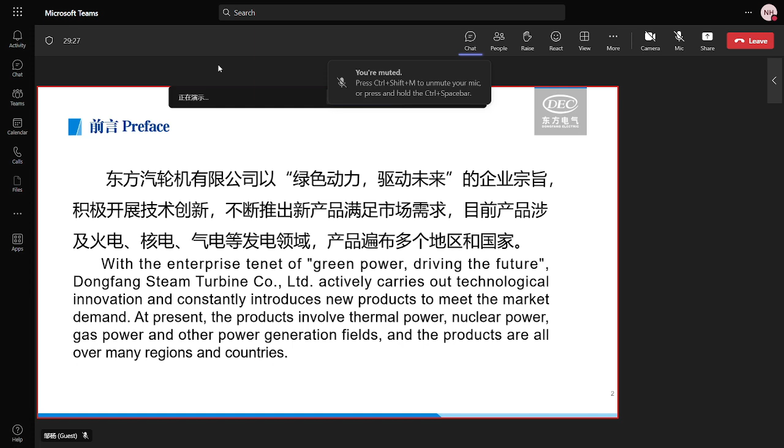Yes, we would like to start with DTC's tenet. With the enterprise tenet of green power driving the future, Dongfang Steam Turbine actively carries out technological innovation and constantly introduces new products to meet market demand. At present, the products involve thermal power, nuclear power, gas power, and other power generation fields, and the products are found in many regions and countries.

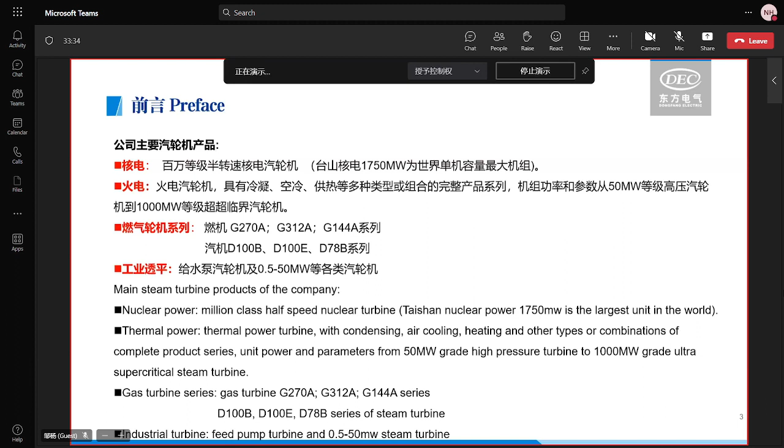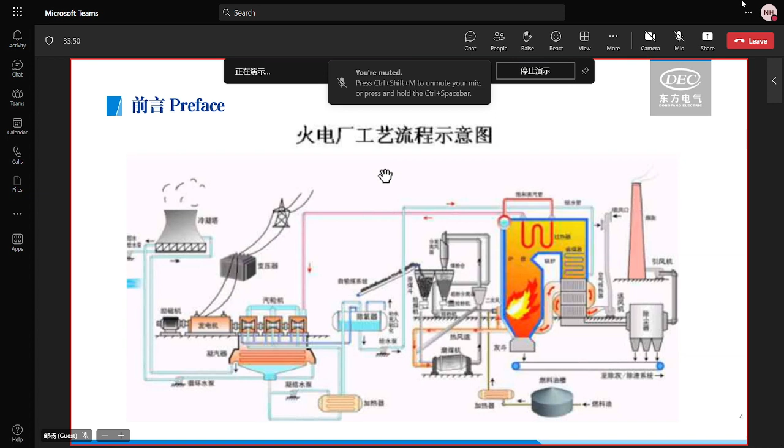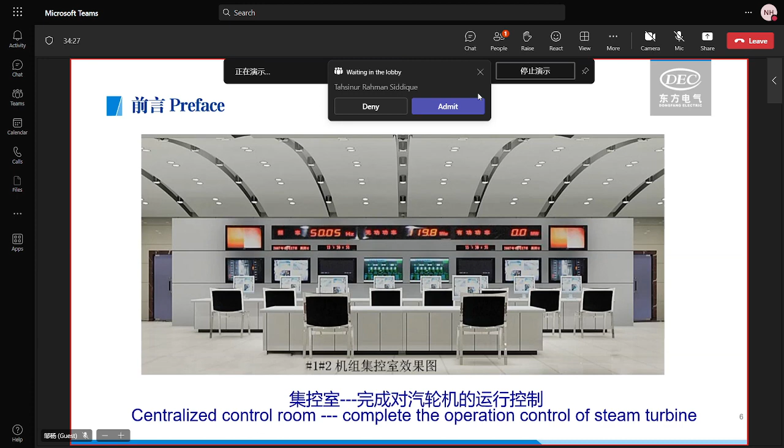This picture shows the centralized control room. In this place, we can complete the control of the steam turbine operation.

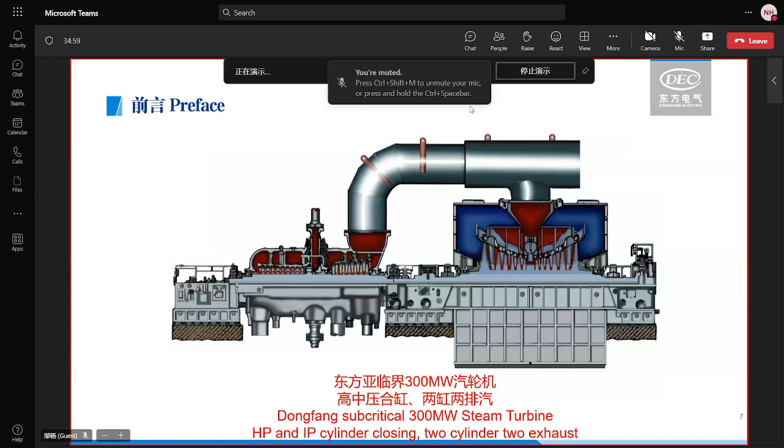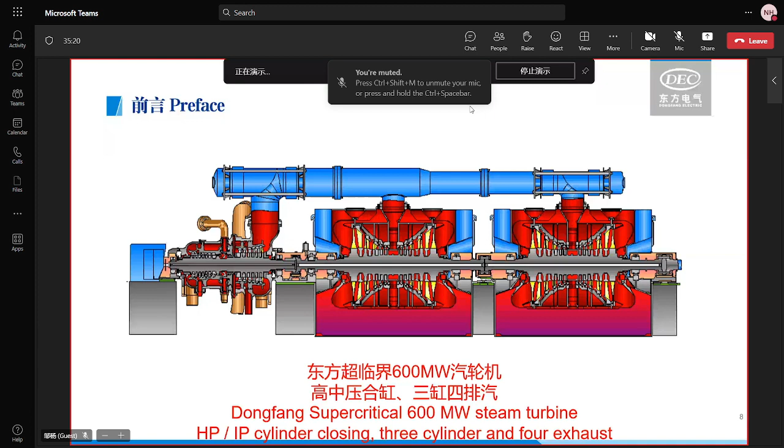This picture shows the Dongfang supercritical 600 megawatt steam turbine, which has an HP and IP combined cylinder, with 3 cylinders and 4 exhausts.

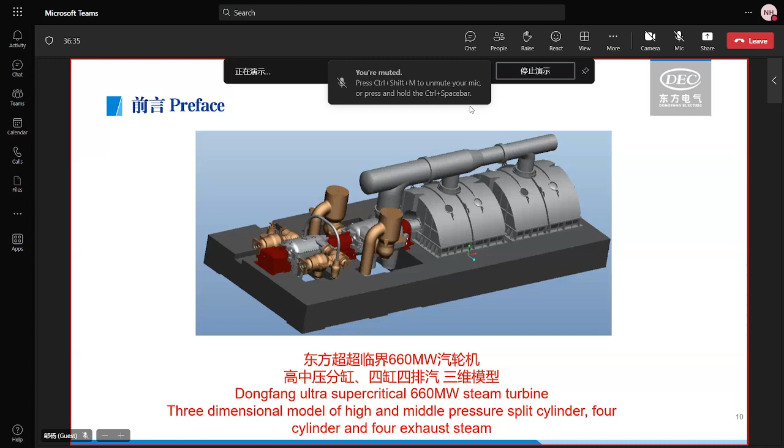That's all for the product introduction. Now we would like to begin with the introduction of typical failures and treatment of a steam turbine.

There are 4 typical failures we would like to introduce. The first is about the steam turbine main body, with 3 minor cases: the case of high temperature of the bearing pad, the case of breaker unlocking, and the case of deposit on the oil deflector.

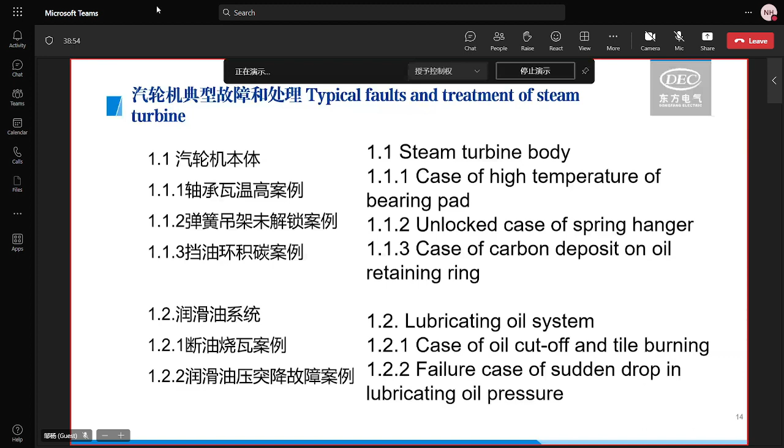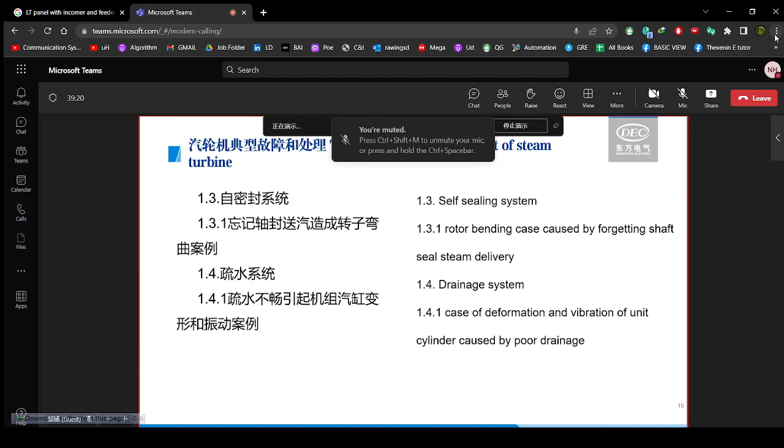The third typical failure is about the self-sealing system. There is one case: the rotor bending case, which was caused by forgetting to check the gland seal steam delivery.

The fourth typical failure is about the drainage system. There is one case: the deformation and vibration of the steam turbine cylinder caused by poor drainage.

By introducing these 4 typical failures, we would like to give our end users DEC's thoughts on on-site troubleshooting.

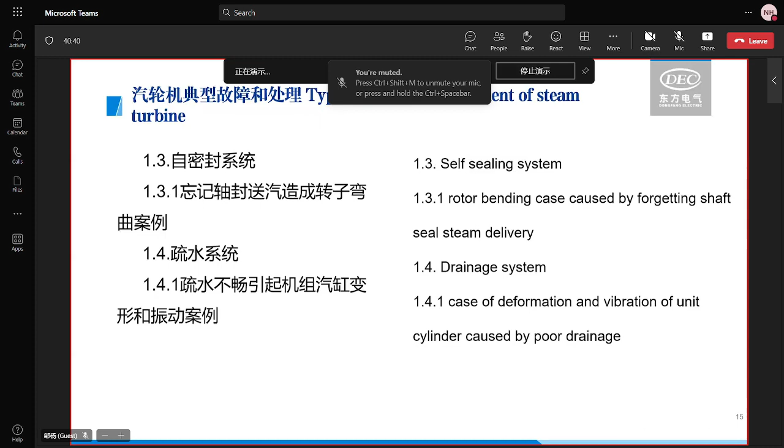Let's begin with the first case, which is the high temperature case of the bearing pad.

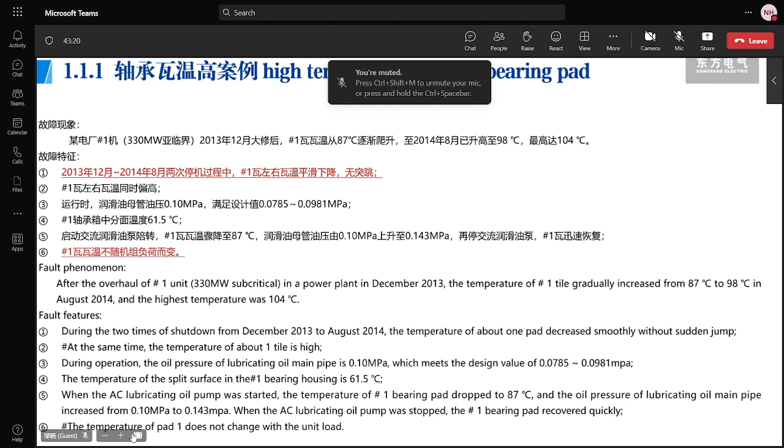Sorry, it must be the wrong translation. The temperature decreased smoothly without a sudden jump, not drop. Sorry. Is that okay? Oh, this one is number one bearing. Yes, number one bearing pad. Which is tilting pad, yeah? Which type is tilting pad? Yes, tilting pad. Okay.

Okay, we will continue. The second feature of this failure is that the number one bearing pad has two temperature measuring ports, respectively on the left side and the right side. And we found that the temperatures measured from both sides synchronously increased.

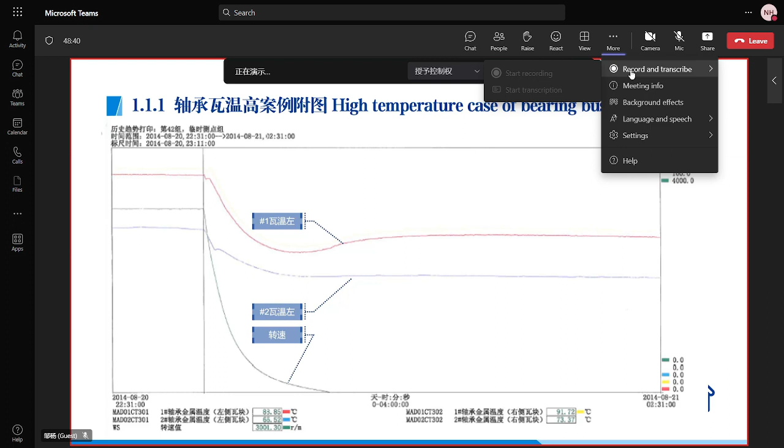This picture shows the temperature curve of number one and number two bearing pads during the turbine shutdown. It can be seen from the picture that the bearing pad temperature decreases along with the decreasing rotating speed, and there is no sudden increase trend of the pad temperature.

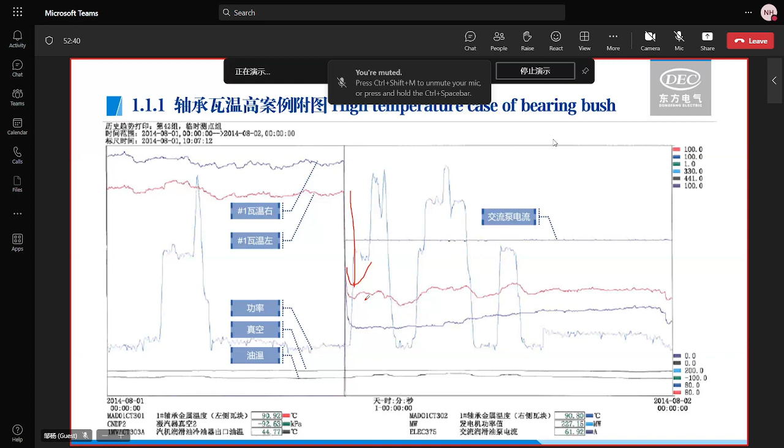第二个点为左右两侧的瓦温同时升高，可以排除测温元件损坏的一个问题。 Because the temperatures measured from the left side and the right side increased at the same time, the damage of the temperature measuring elements can be ruled out.

第三个点为轴承箱温度正常，排除了气缸热辐射对这个瓦温的一个影响。 The temperature of the bearing housing is normal, so we can eliminate the heat radiation of the cylinder on the temperature of the bearing pad.

The temperature of the pad does not change with the unit load, and the bearing pad temperature was normal at the initial stage after minor repair. So the influence of the shaft load distribution on the bearing temperature and the problem of bearing installation can be ruled out.

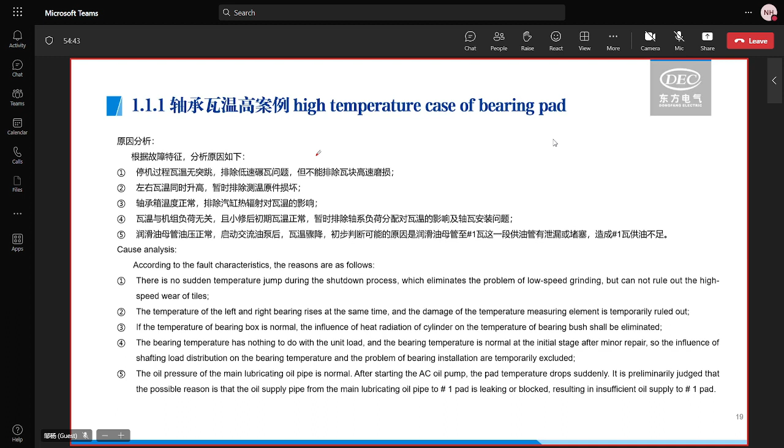The oil pressure of the main lube oil pipe is normal. After starting the AC oil pump, the pad temperature drops suddenly, so it is preliminarily judged that the possible reason is the oil supply pipe from the main lube oil pipe to the number one bearing pad is leaking or blocked, which can result in insufficient oil supply to number one bearing pad.

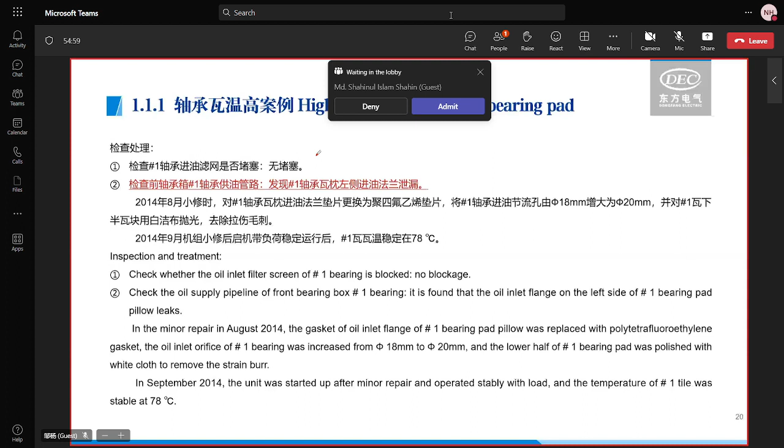然后是我们的一个检查及处理过程。第一点，我们检查了1号轴承箱进油滤网是否堵塞，结果为没有发现堵塞。 Yeah, let's take a look at what we inspected and what the treatments were. First, we checked whether the oil inlet filter screen of number one bearing is blocked, and the result is no blockage.

从第2个检查点，我们发现了问题所在。检查前轴箱1号轴承进油管路时，我们发现1号轴承左侧的一个进油法兰存在一个泄漏。 And we checked the oil supply pipeline of the front bearing box number one bearing. It is found that the oil inlet flange on the left side of number one bearing pad leaks.

在2014年8月的小修时，我们对1号轴瓦轴承进油法兰垫片进行了更换，将1号轴承进油孔由18毫米增大至20毫米，并对1瓦下半瓦块抛光，去除了拉伤毛刺。 In the minor repair in August 2014, the gasket of oil inlet flange of number one bearing pad was replaced, and the oil inlet orifice of number one bearing was increased from 18 millimeters to 20 millimeters. And the lower half of number one bearing pad was polished with the white cloth to remove the strain burr.

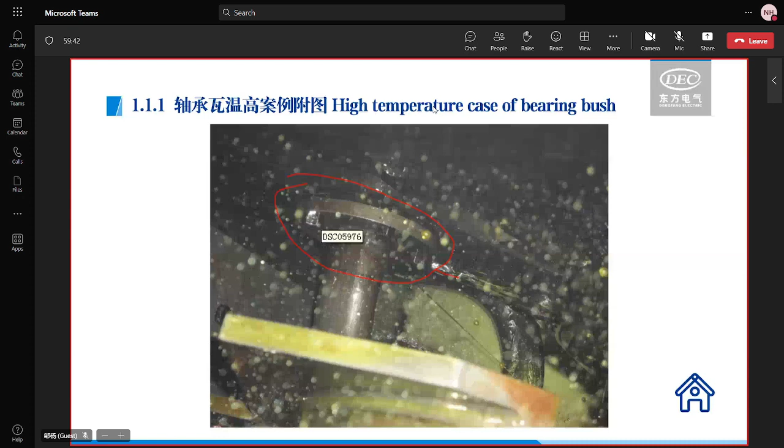The simple reasons for insufficient oil supply are oil pipe leakage, as mentioned in the case before. There is also pipeline blockage, such as whether the size of oil inlet throttle orifice meets the design requirements, whether there is foreign object blockage in the pipeline, the gauze blocking the oil hole falls into the oil pipeline during maintenance, and the temporary filter screen is not removed during the oil flushing. Specific analysis needs to be carried out according to different situations.

我们开始第二个案例的讲解。第二个案例为弹簧吊架未解锁的一个故障。 Next, we would like to introduce the typical failure of the spring hanger not unlocking. 它的故障现象为电厂一号机组… Hello. Yes. Yes.

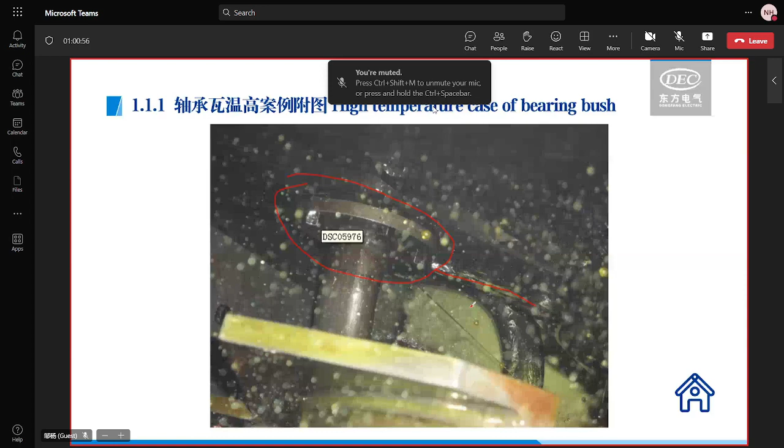So, what problem is the temperature rise to 104 degrees Celsius? So this one happened only for the insufficient lube oil supply, yes, and the leakage.

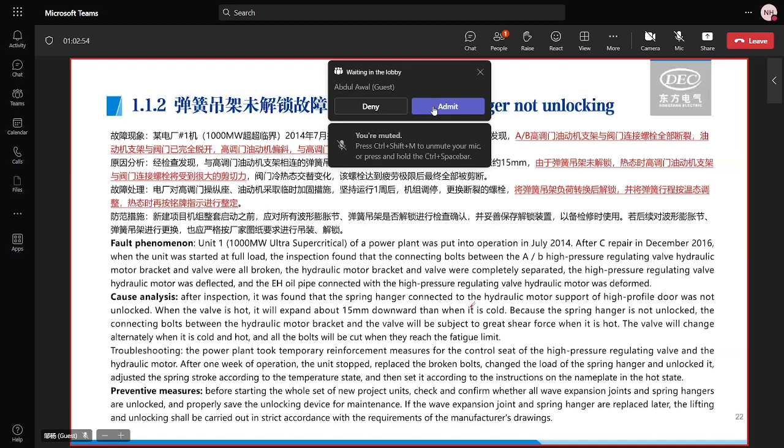Yeah, the main reason for the insufficient oil supply might be the blockage or the leakage. Yes, you're right. Blockage and leakage. But in our plant, they already installed the orifice for controlling the flow. But how can we understand that we need to increase the flow? The orifice diameter is changed from 18 to 20 as per previous problem. So if we find out the leakage, why we change the orifice diameter? Okay, just a moment.

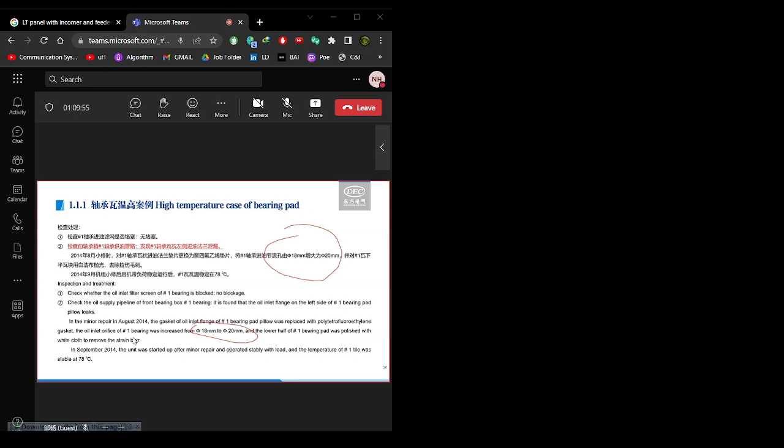And your concern is that if we increase the diameter, will it influence the oil supply for the number 2, 3, 4 bearings? This one I am saying that if another bearing also has the same problem. If the number 2 bearing has the same problem, and we increase the orifice diameter, then the lube oil main header pressure will be less.

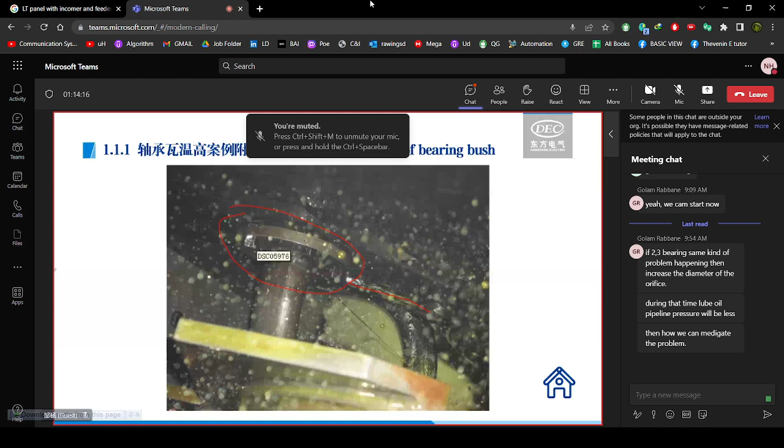Okay. Why I am asking is that we solve the leakage problem, and that means flow will be sufficient as per your design. But if we increase the orifice diameter, the lube oil main pressure will be less, and then for other bearings the oil supply may not be sufficient. So that's why I was asking on which basis we are saying that we need to increase the oil flow. So that's okay. Okay, thank you.

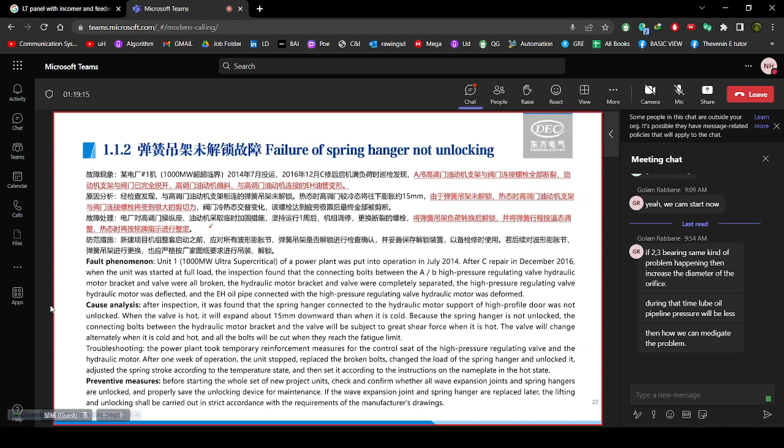The power plant took temporary reinforcement measures at the high pressure control valve actuator. After 1 week of operation, the unit stopped, replaced the broken bolts, changed the load of the spring hanger, and unlocked it. The spring travel was adjusted according to the warm state and set according to the instructions on the nameplate in the hot state.

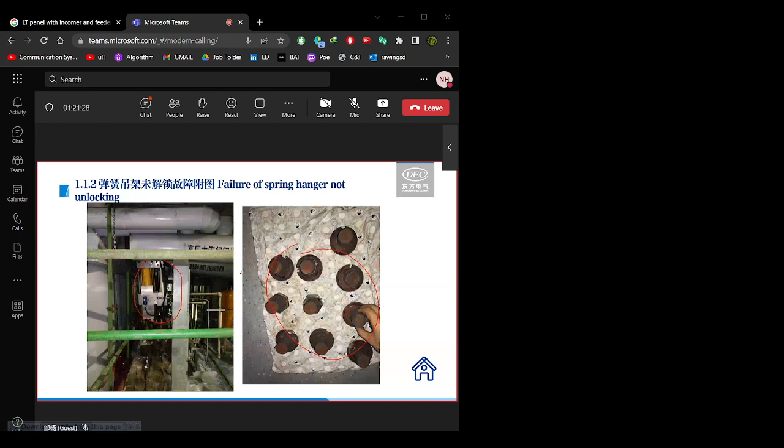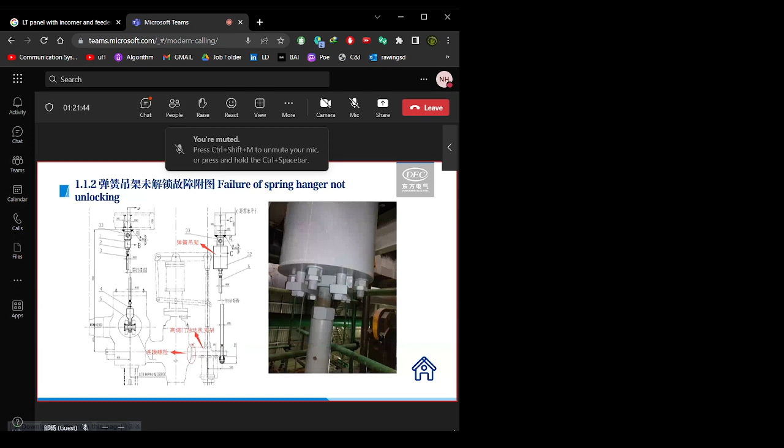On the left side, this picture shows the schematic diagram of the connection between the actuator support and the valve. Here is the installation place for the connecting bolts.

This place is the spring hanger installation place. And the picture on the right side shows that the spring hanger is not unlocked.

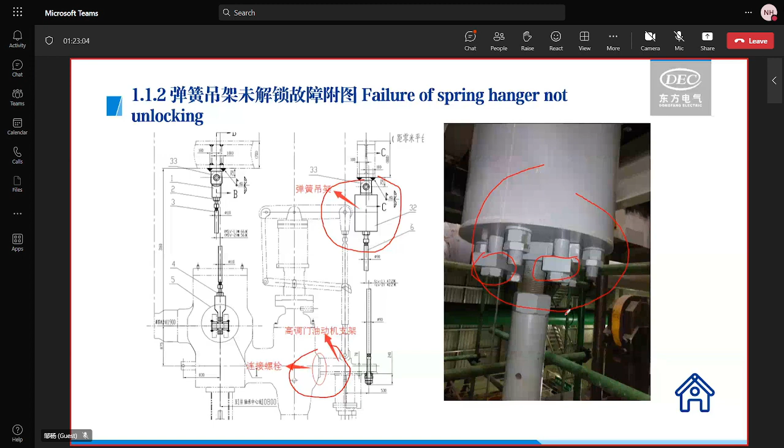Because the spring hanger is not unlocked, the whole support becomes rigid. The cold and hot states of the valve change alternately, and the connecting bolts are subject to additional shear force, which eventually leads to bolt fracture.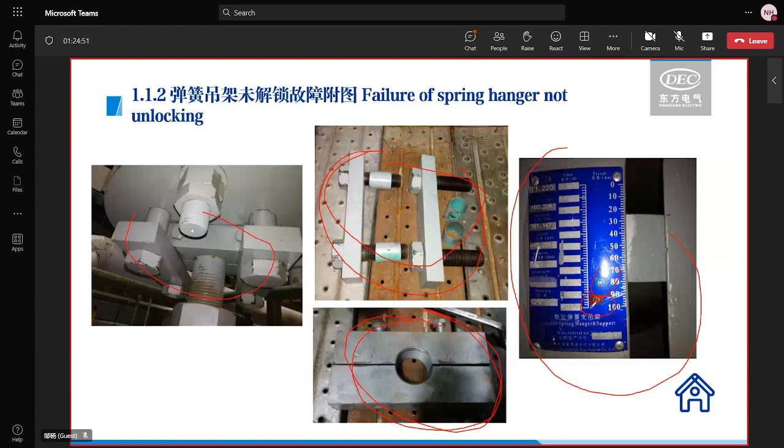During the installation, it is necessary to unlock the spring hangers and the bellows in all systems to avoid the failure after the unit operation.

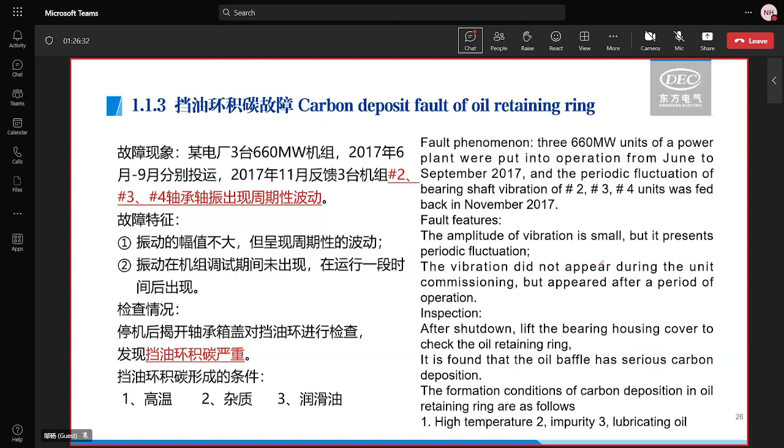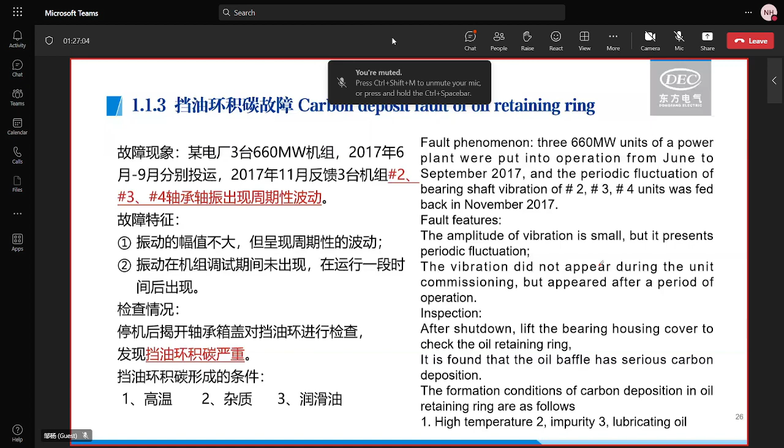Third case is about the carbon deposit layer of the oil deflector. 3 units of the power plants were put into operation from June to September 2017. Number 2, number 3, and number 4 bearings of the 3 units all occurred failure of periodic fluctuation vibration, and these failures were fed back in November 2017.

The feature is the amplitude of vibration is small, but it presents a periodic fluctuation. This vibration failure did not appear during the unit's commissioning, but appeared after a period of operation.

And we did some inspection after the shutdown. Lifted the bearing housing cover, checked the oil deflector. It was found that the oil deflector has serious carbon deposits.

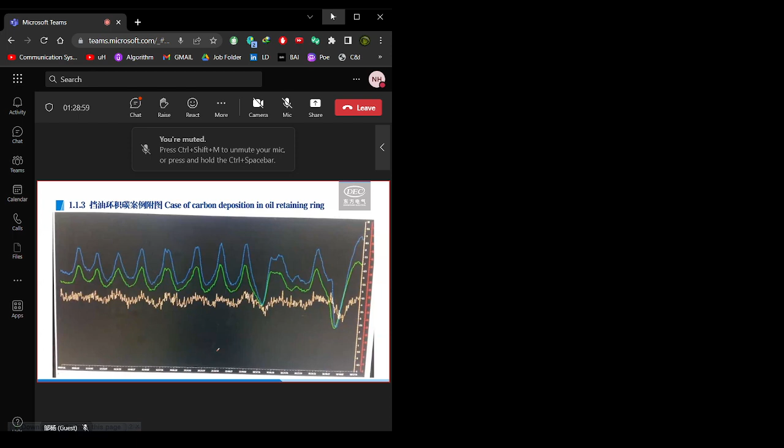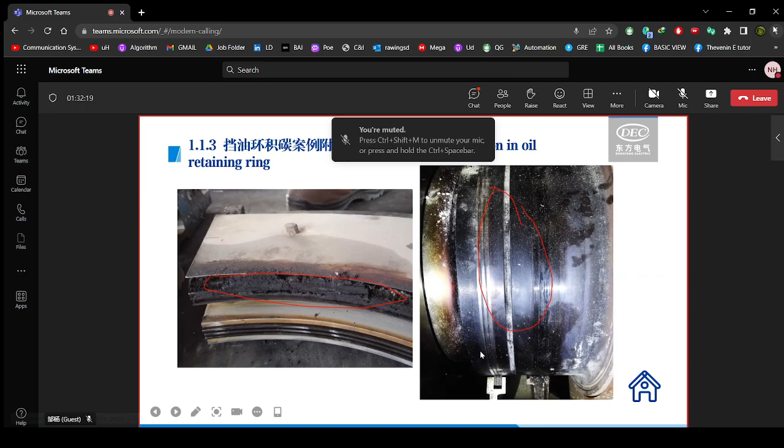The carbon deposition of the oil deflector mostly occurs at the high pressure steam inlet and the intermediate pressure steam inlet ends, where the temperature at these two positions can meet the requirements. At these two positions, there is the high temperature.

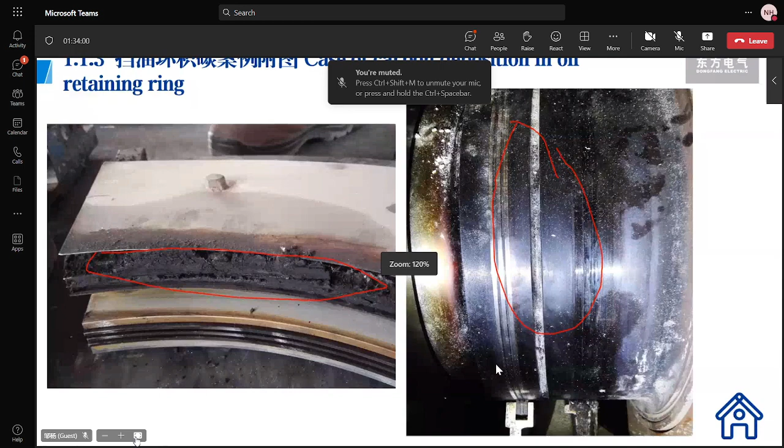For the units with hidden danger of carbon deposition in the oil deflector, replacing it with a new type of air oil deflector can also be considered. Compressed air is introduced into the oil deflector to avoid impurities entering and to avoid carbon deposition in the oil deflector.

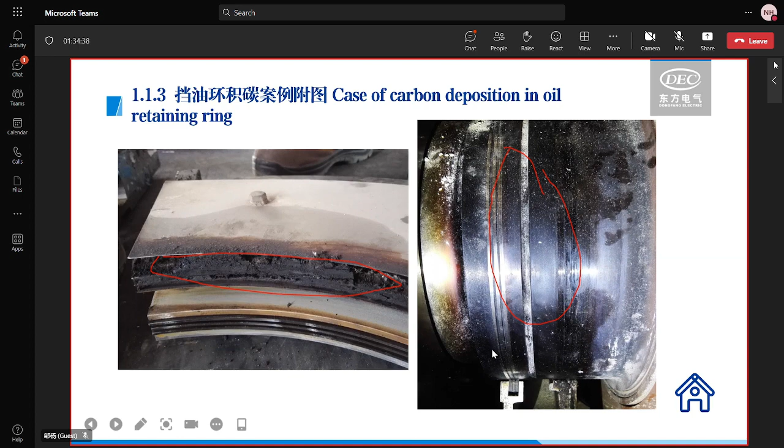Now let's talk about the failure that happened in the lube oil system.

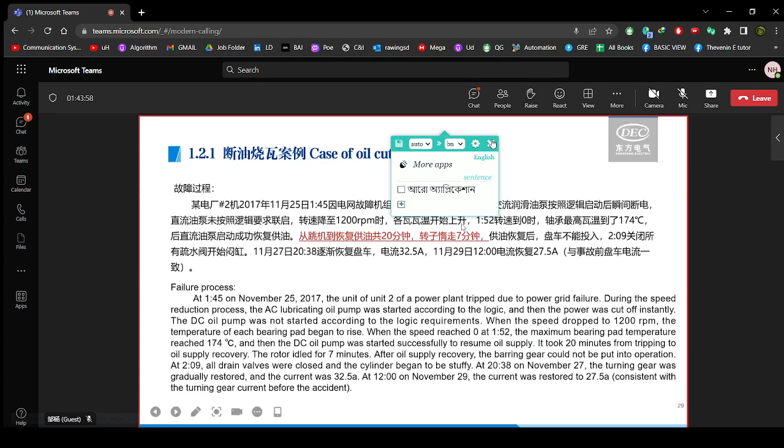Now we'll continue with the case of the oil cut off and the pad burning. Okay, at 1:45 on November 25th, 2017, unit 2 in the power plant tripped due to the power grid failure. During the speed reduction process, the AC lube oil pump was started according to the logic, and then the power was cut off instantly. The DC oil pump was not started according to the logic required.

When the speed dropped to 1,200 RPM, the temperature of each bearing pad began to rise. When the speed reached 0, at 1:52, the maximum bearing pad temperature reached 174 Celsius, and then the DC oil pump was started successfully to resume the oil supply. It took 20 minutes from tripping to oil supply recovery. The rotor coasting lasted for 7 minutes. After oil supply recovery, the turning gear could not be put into operation.

At 2:09, all drain valves were closed, and the cylinder remained in high pressure and closing state. At 20:38 on November 27th, the turning gear was gradually restored, and the current was 32.5 amp. At 12 o'clock on November 29th, the current was restored to 27.5 amp.

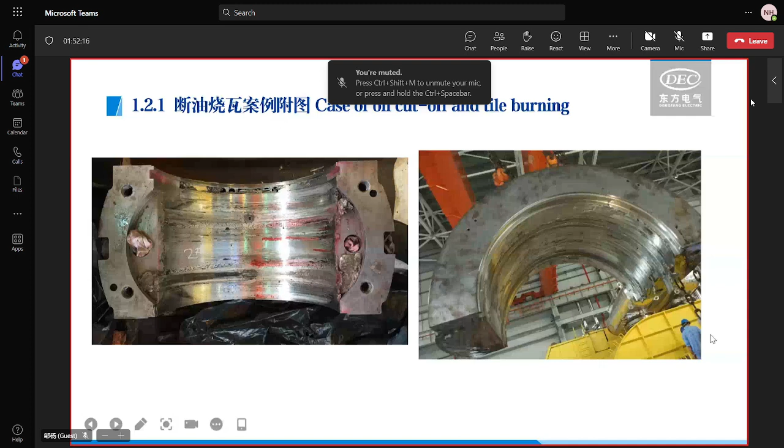Seal the gland seal or cylinder with thermal insulation cotton. After the cylinder is blocked, start the turning once every 1 hour, or manually turn once moderately until the turning gear can be put into operation. Do not restore the jacking oil immediately after the oil cut off and pad burning.

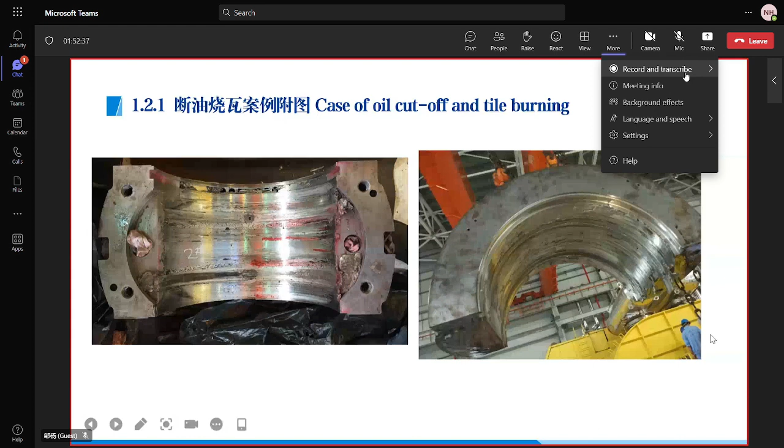Pad burning occurs when the shaft journal is still at high temperature after friction with the bearing. Sudden oil inlet is easy to cause the shaft cracking or crack expansion.

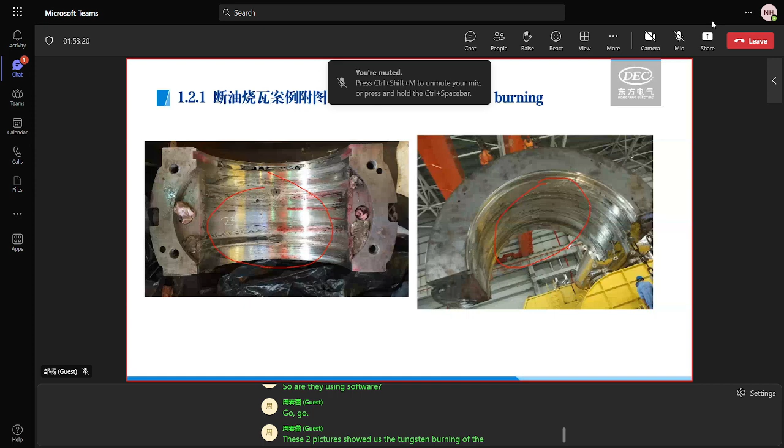These two pictures show the tungsten burning of the shaft bearing.

This picture shows the thrust bearing pad was worn.

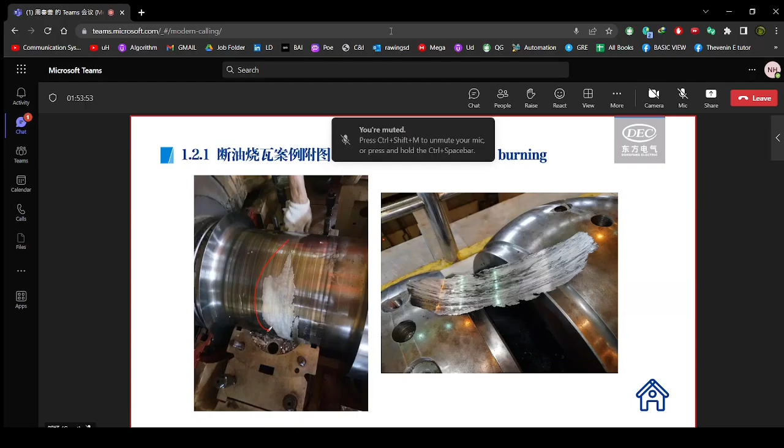This picture shows the shaft journal was damaged.

This is the tungsten sheet that was squeezed from the bearing.

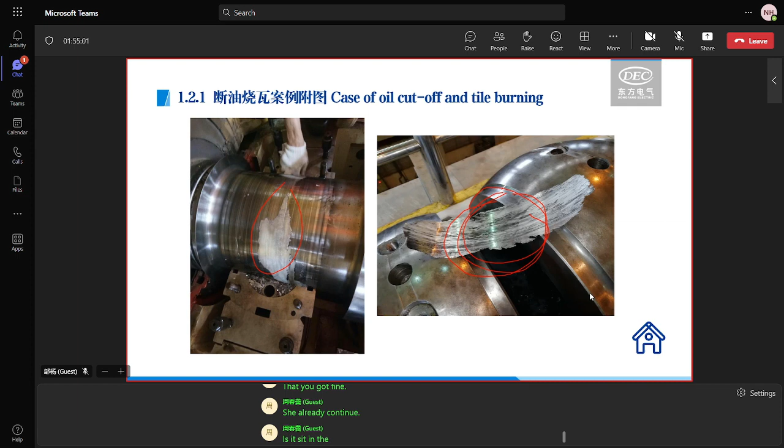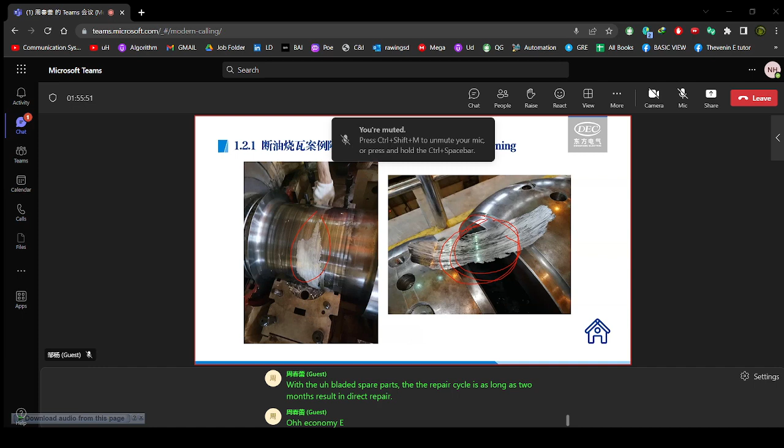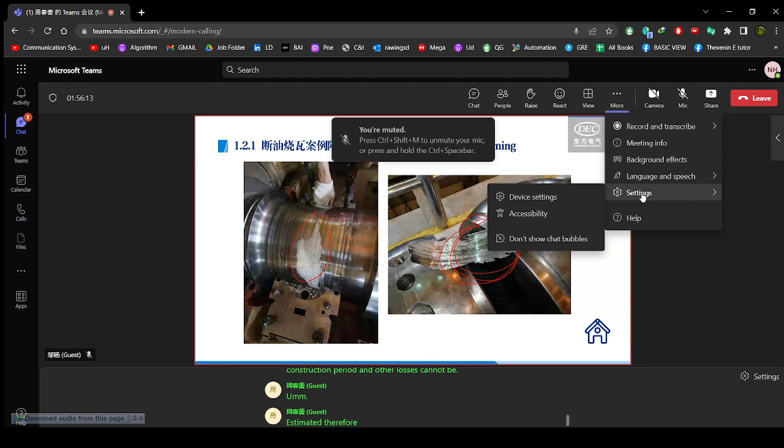The consequences of oil interruption causing pad burning are serious due to the collision between the steam seal and the blade. Blades on the rotor had to be replaced in domestic power plants with spare parts, and the repair cycle was as long as 2 months, resulting in direct repair economic loss of 40 million RMB. The indirect loss of electricity power, construction period, and other losses cannot be estimated. Therefore, we suggest that power plants, especially foreign power plants, need to prepare relevant spare parts in advance to reduce accident losses.

We now move to the second failure case in the lube oil system: a sudden drop in lube oil pressure.

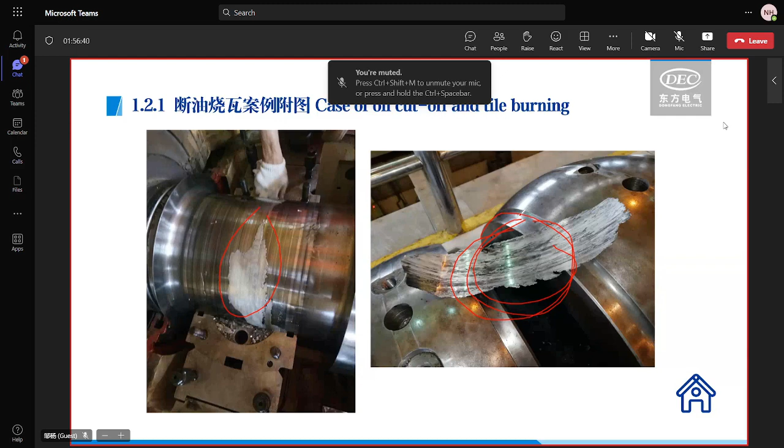During the test run operation of one unit, an ultra high pressure unit with output of 135 megawatt in a power plant, in April 2015.

After the overspeed test, the oil pressure of the lube oil main pipe suddenly dropped from 0.17 megapascal to 0.14 megapascal. During the 72-hour test run operation, the unit was loaded with 125 megawatt. The oil pressure of the lube oil main pipe suddenly dropped from 0.13 megapascal to 0.115 megapascal, and the oil pressure of the lube oil main pipe rose to 0.19 megapascal.

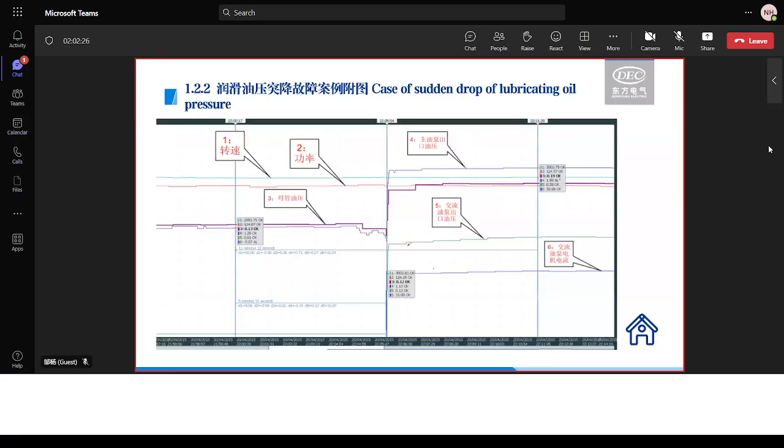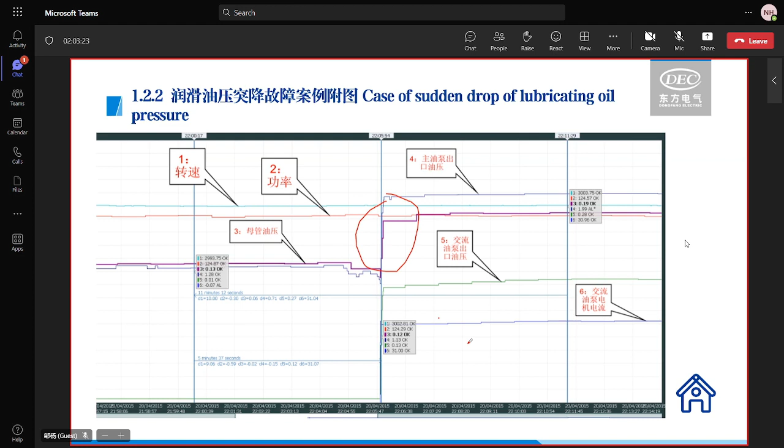This picture shows the second sudden drop of the lube oil pressure during the 72-hour test run. The lube oil pressure suddenly dropped from 0.13 megapascal to 0.115 megapascal. After starting the AC lube oil pump, the pressure of the lube oil main pipe rose to 0.19 megapascal.

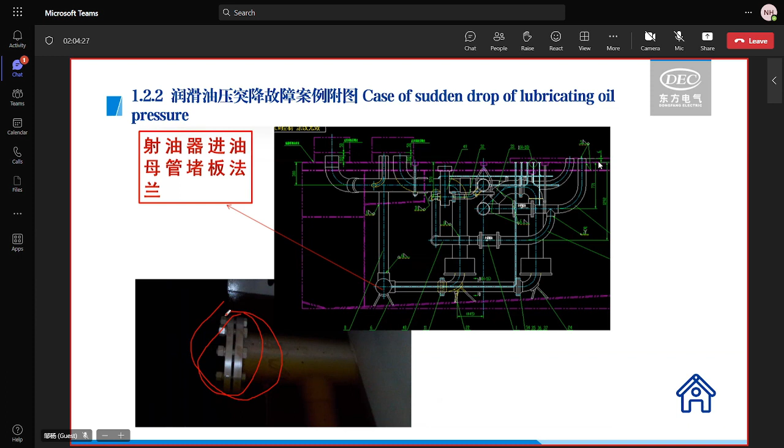This shows that the flange gasket at this position is lost, which leads to insufficient oil supply of the oil ejector and the sudden drop of the oil pressure.

Our reason analysis: first, since all the parameters of the whole set startup lube oil system are within the design range, we can eliminate the design and manufacturing reason of this system.

Second, in the turning state, the oil pressure of the main lube oil pipe can return to the level before the sudden drop, so the leakage of the lube oil supply pipe can be eliminated.

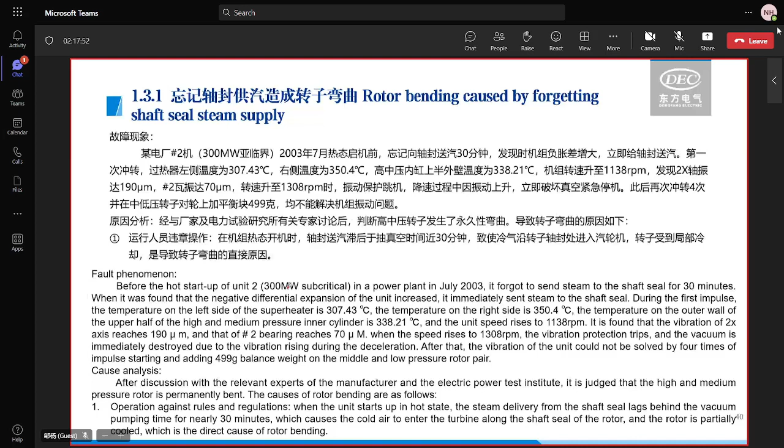The main steam temperature during the rolling does not meet the requirements of the hot startup state. The main steam temperature on the left side is 307.43 Celsius, and on the right side is 350.4 Celsius, while the outer wall temperature of the upper half of the HIP inner cylinder is 338.21 Celsius, and the negative temperature difference during the startup is an important reason for the increase of the rotor bending.

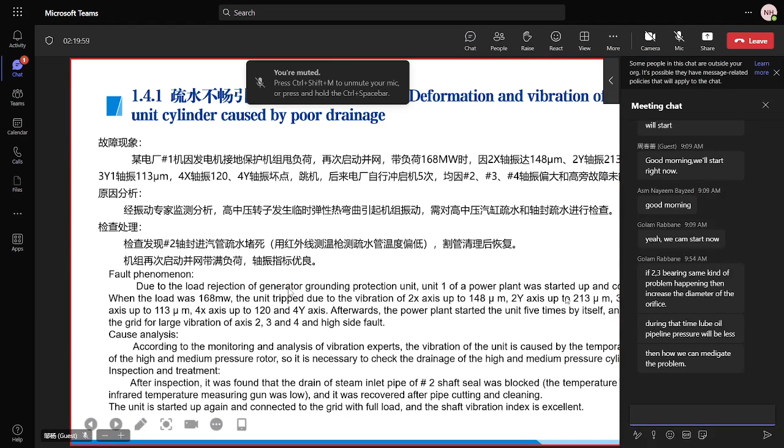Okay, you can continue. Thank you. Thank you. See you this afternoon. Bye.